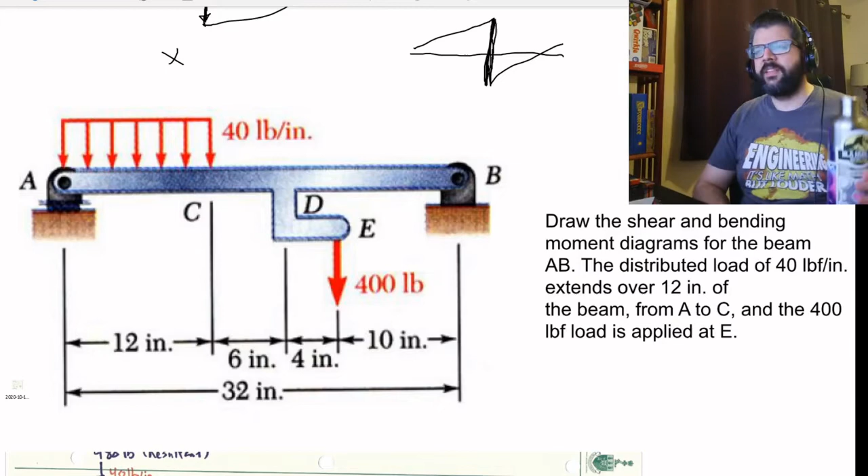Okay, so this is the one we're going to be working through next. We've got this beam here, distributed load, and then it's got this 400-pound force that's applied. There's a bit of a twist in that the force is applied on this arm that's hanging underneath. So we'll talk about how to deal with that as well.

But first things first, let's figure out what the reactions are. I've got our free body diagram up here. Got cut off a little bit at the top.

That's just me writing in the resultant of that 40 pound per inch distributed force. That'll be 480 pounds since it's spread over a 12-inch area. And we got this gap here. Then we got the arm coming down here, the 400 pounds, and our reactions.

So first things first, which one's usually the easiest to do? Sum of the forces in the x direction is equal to 0. Therefore, Bx is 0. Cross that one off. Yay! Next up, I'm just going to take the moment about point A here.

So we've got the moment caused by the resultant of the distributed load. That'll be a negative moment since that's acting clockwise. So negative 480 pounds times 6 inches, because the resultant is located halfway between the span there. We've got the 400 pounds times the 22 inches from here to here. Again, clockwise when taken about A, so it's a negative moment.

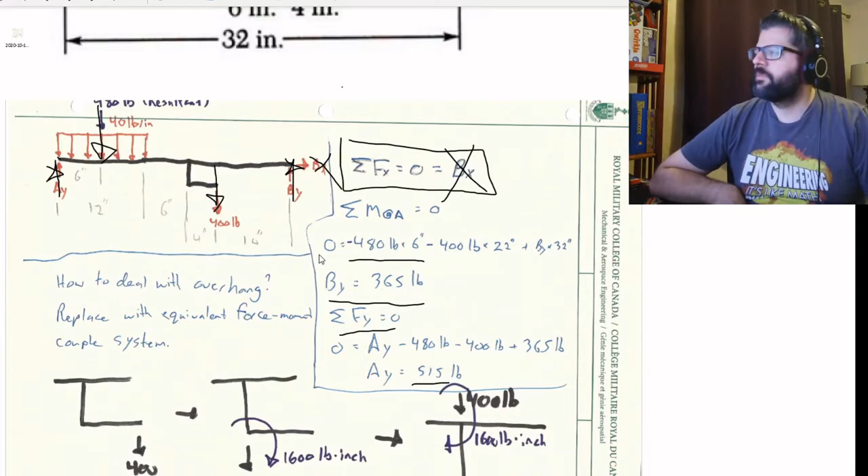So we got our reactions. There's the question of how to deal with this overhang here. So the way to do that is basically to replace this with an equivalent force moment couple system.

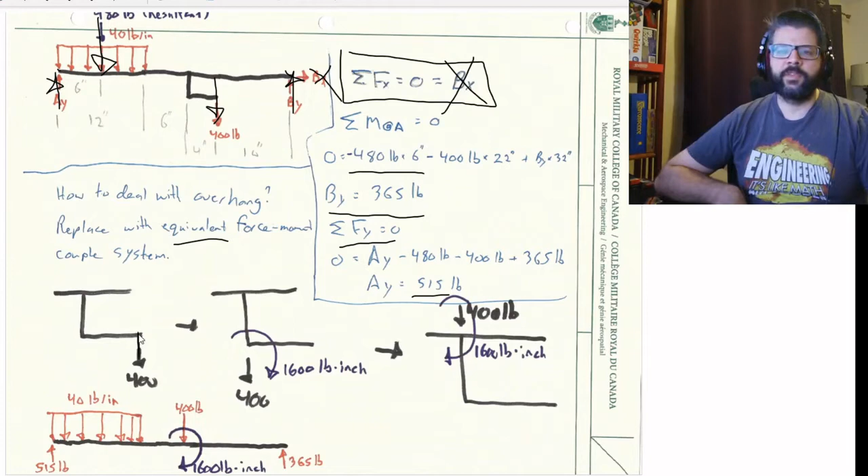So if we have the force coming down here, we realize that we can shift it back and forth along this little section of the overhang here. And we can do so and have it be equivalent as long as we add a moment equal to the amount of the moment that would be caused by this force relative to the spot that we're moving the other one to.

So if we shift the 400 pound force here over to this spot here, then relative to here, this force would have caused a 1600 pound inch moment in the clockwise direction. That's just 400 pounds times the 4 inches that shifted over.

So we've got that. And then from there, we can shift the force moment couple system upwards without impacting things because it is moving in the line of action of the force. So we don't need to add any additional moment to go from this point to this point. Shifting upwards like this doesn't matter.

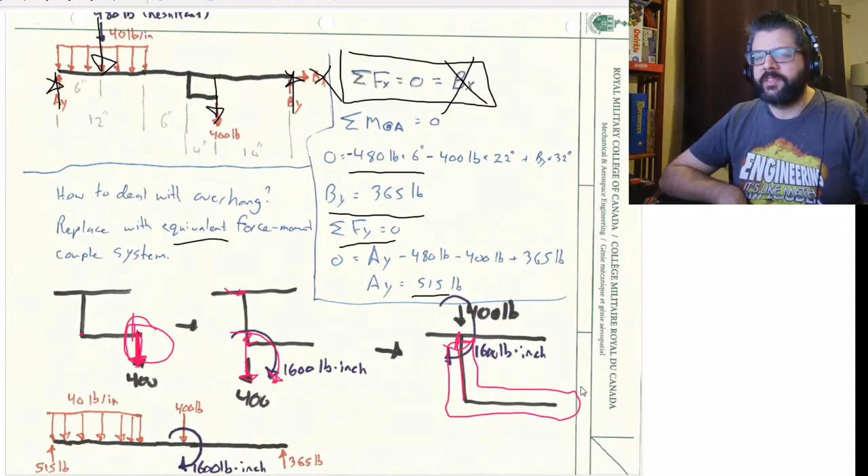But kind of just redraw a free body diagram with that equivalent force moment couple system in place. So we got our 515 reaction, our 365 reaction, our point load, our moment applied there, and we've also got our distributed load.

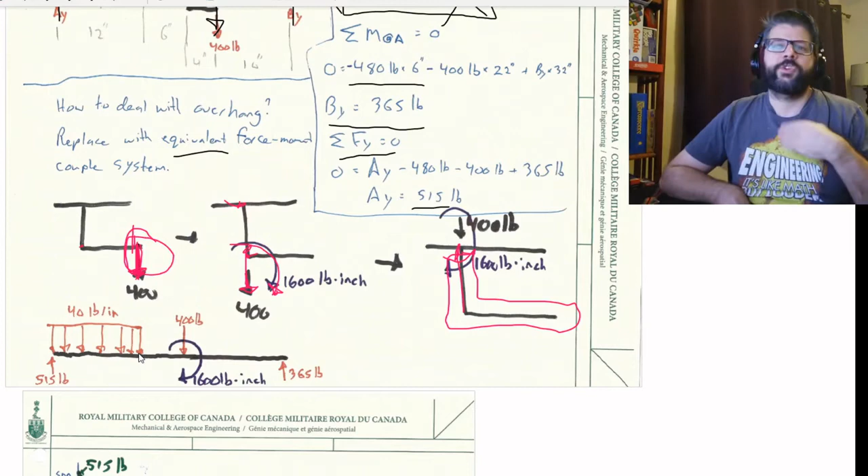So I'm keeping this one as the distributed load because we're going to be using this to draw our shear diagram. Essentially, you just start from one end and work your way to the other, keeping in mind the rules.

If we are moving from left to right on the graph, and we have a force that is applied upwards on the beam, that causes a jump up in the internal shear load at that point. And then a distributed load can act either upwards or downwards, although the majority of them are going to be acting downwards, since there's some sort of gravitational force representing some sort of mass distributed over the space.

So we jump up to 515 at the start based upon that point load, and then we've got this distributed force here, and that pushes us down, so that gradually decreases the shear until you get to the point where that stops. The slope of this line is equal to the magnitude of that distributed load.

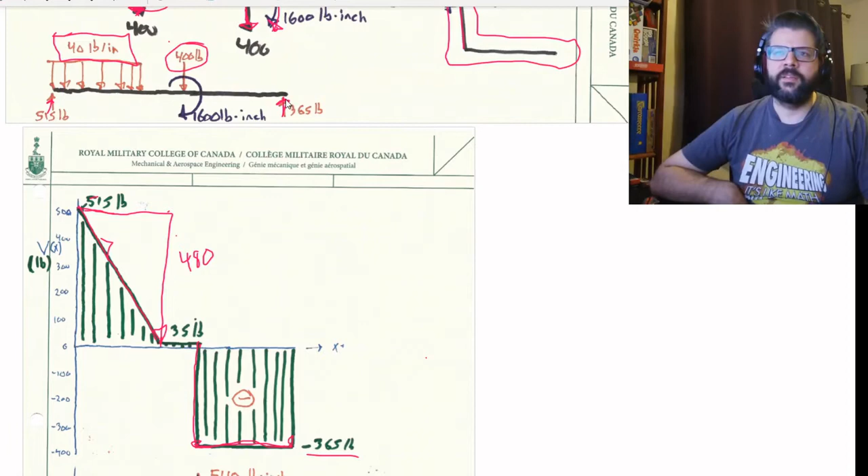Now that amount stays constant over this length until we get to this point, and then we get to this force right here. So that causes us to jump up by an amount equal to 365 pounds, which, thankfully, brings us back to 0, which is exactly where we expected to end up when we finished our diagram.

If you ended up getting to a point other than 0, there's something wrong with your diagram, and you should go ahead and revisit that.

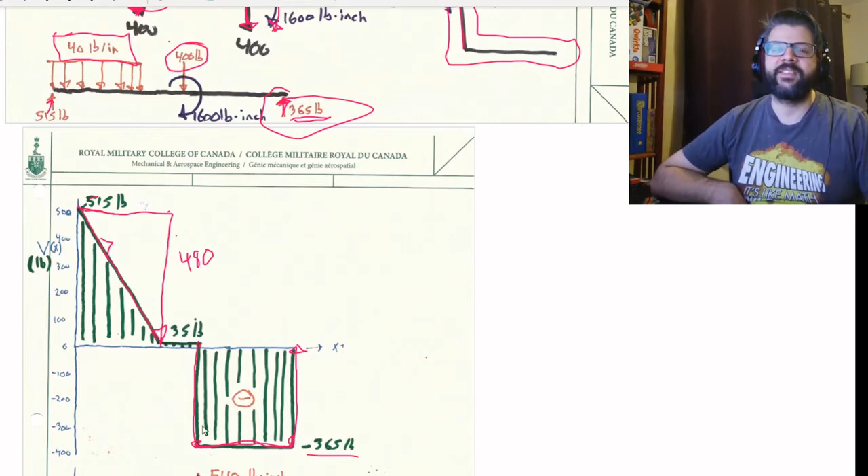So next up, we are going to be worried about what happens to our moment diagram. We know that the endpoints are going to be 0 because there aren't any reactions, because they're both pinned at the end. There's a pin here, there's a pin here, so there's nothing there that would cause a point moment.

The internal moment kind of develops over time with shear, unless you have some sort of reaction at the end where you have a moment couple applied to the end of the beam, such as what we saw with this previous example.

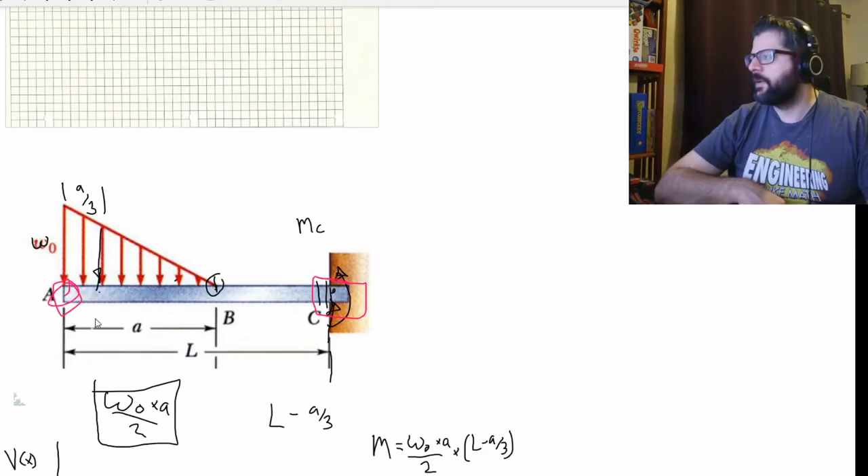Any fixed connection at the end will cause a non-zero moment at the end of the beam, but it doesn't happen on this end because that's a free end, and it doesn't happen here or here because those are both pinned connections.

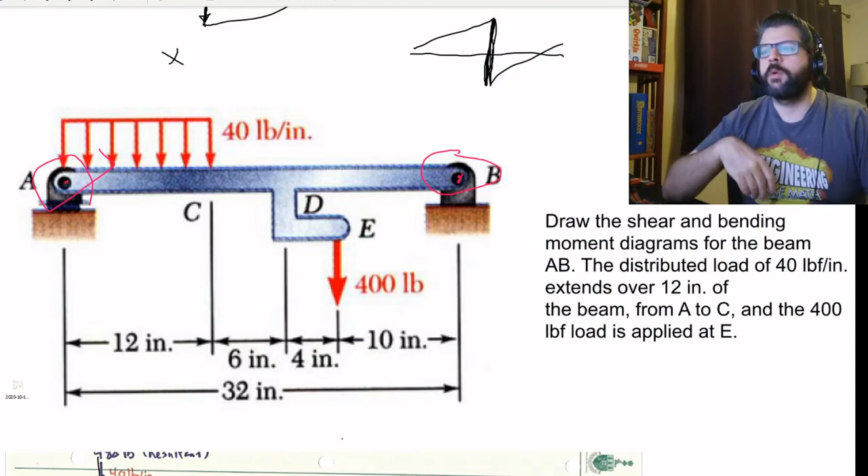They're specifically designed to allow it to rotate. So because it's allowed to rotate, there's nothing there to resist rotation, and so there's nothing there to generate a reaction moment. So we know it's 0 here and 0 here, and we can start from either of those points and work our way toward the other end.

So looking at this, it seems like the easiest way to start would be to start from this end and kind of draw this straight line, because starting with a straight line helps. So we're starting from here and working our way backwards to here.

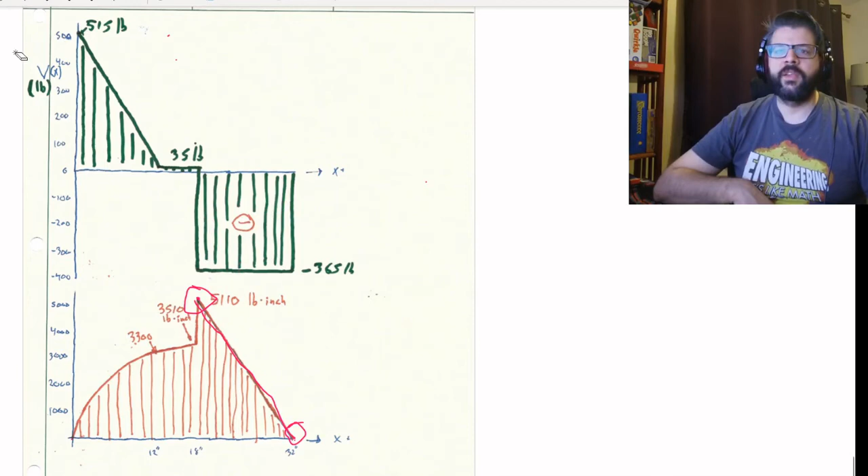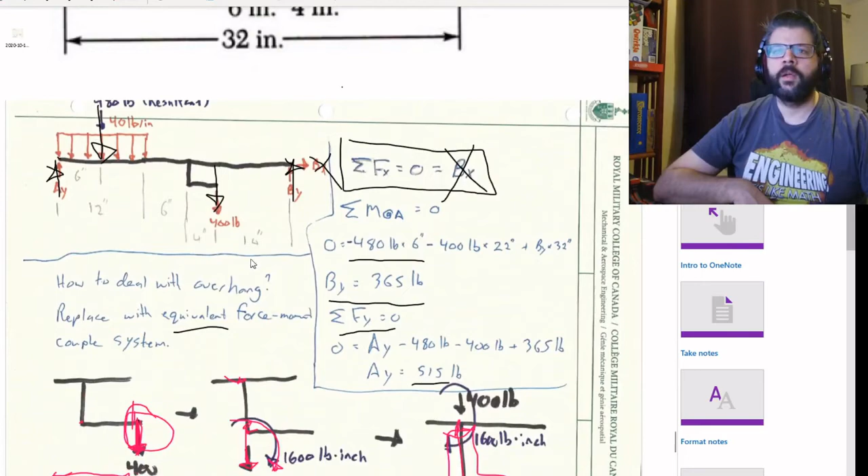So we know that the magnitude of the drop from here to here is equal to the area of this section. So that'll be the 365 pounds times the distance from there to there, which is our 10 inches plus our 4 inches, so 14 inches.

365 times 14 inches gives us a magnitude of change of 5,110, and again from this point to this point it's a drop because this shear here is negative. We know the endpoint here is 0, so when it starts dropping here, that means that value there is 5,110 pound-inches.

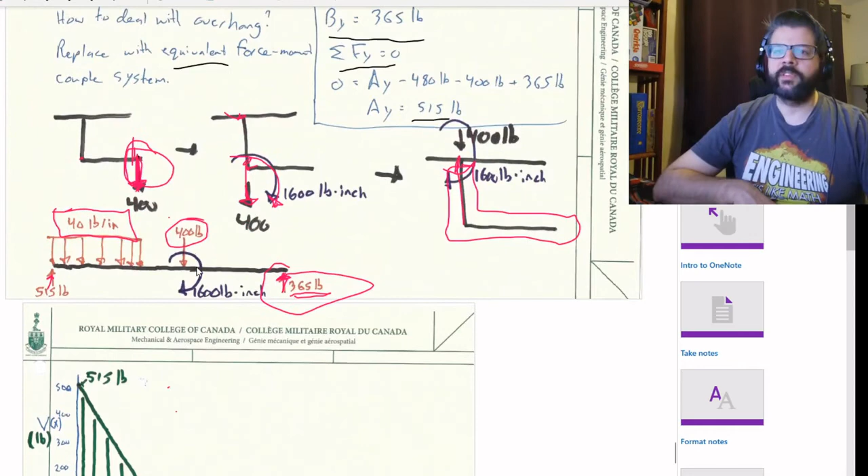We're worried about what happens on the shear diagram when it comes to the moment diagram, but we're also worried about our point moments. The point moments don't show up on the shear diagram, but you definitely need to take them into account.

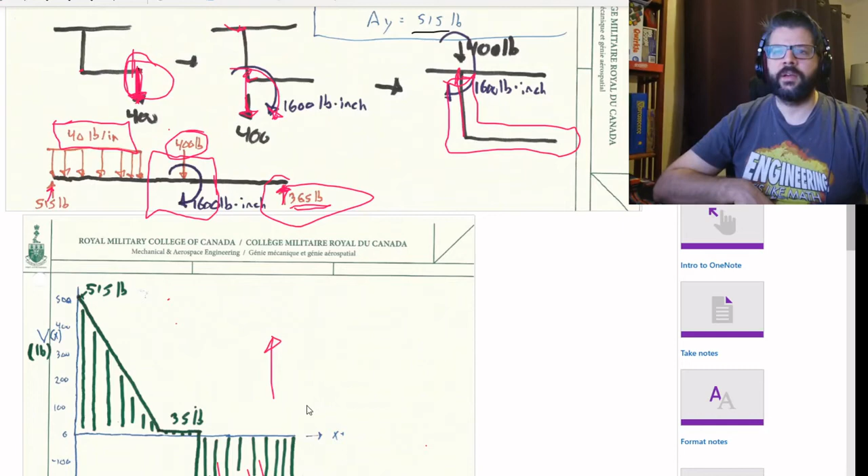So again, when going from left to right, a negative moment is going to cause an increase in the moment. When we're working from right to left, the opposite happens. So if we're starting from the right and we have a negative moment here, then it decreases as we hit that point. So at that point, the moment drops down by 1,600 pound-inches.

So that'll bring us to 3510 pound-inches at this point. Then we've got this linear section right here. Again, we know that section is linear because the shear load over this area is constant, a constant 35 pounds.

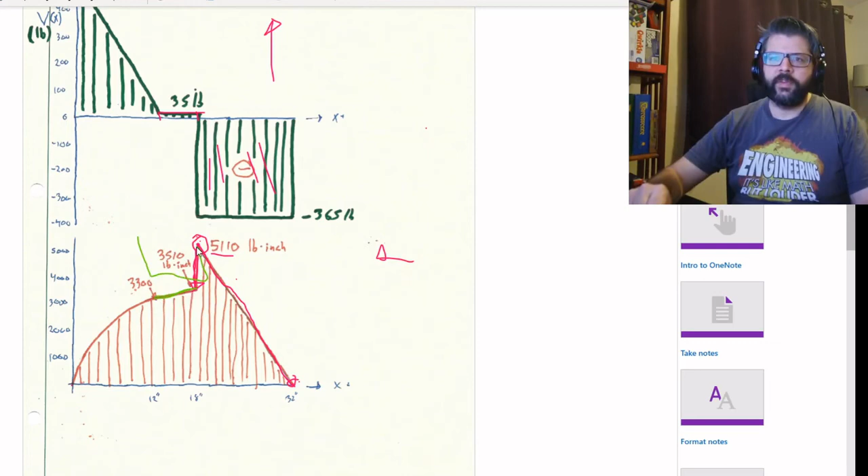So we know that the slope from here to here is going to be a constant 35 pounds. So if we're starting from this end, we can take our 3510 and subtract from that 35 pounds times 6 inches. Again, this is a 6-inch span, and that gets us down to 3,300 pound-inches.

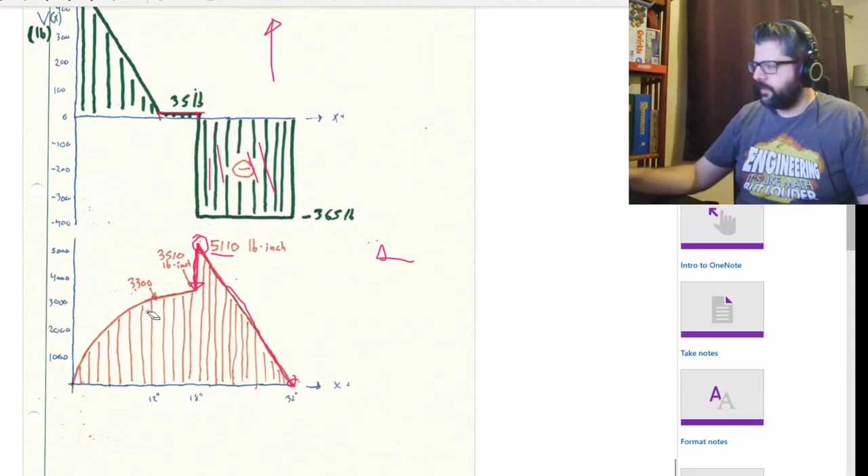And then at this point, it stops being linear, although I'm going to zoom in a bit here.

So it stops being linear at this point, but at that instant the slope is still the same, and then the slope changes and gradually increases, going from right to left. If we're looking at it from left to right, the slope starts off at its maximum and gradually decreases until it gets to that point. Maximum slope, minimum slope. So it drops off quite a bit, and this will be a quadratic kind of equation between here and here.

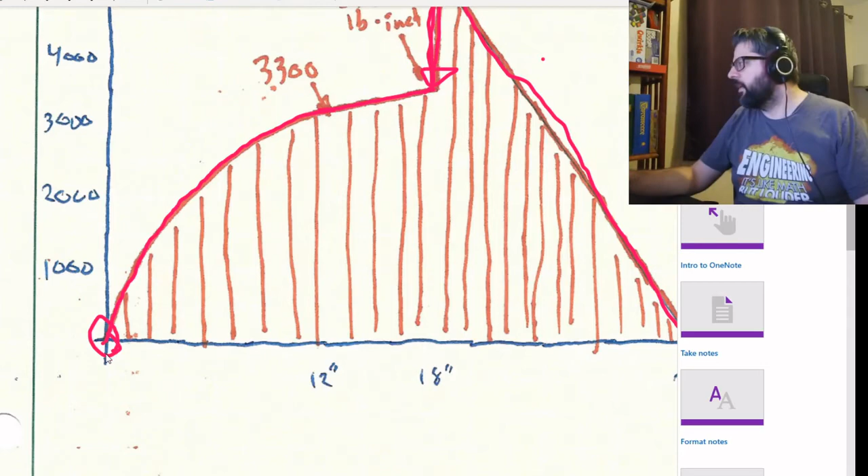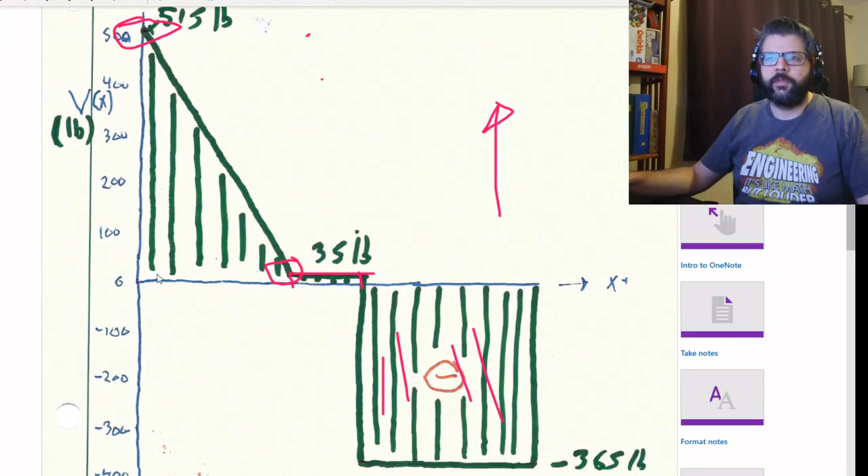So that's that curve there. Again, the magnitude of the drop-off between here and here is going to be equal to the area under this curve. So if we want to calculate that, we need to break this up into its two components. We've got this section here, this thin skinny rectangle, and we've got this triangle here.

So again, the height of that triangle is the 480. That was the resultant of that force there. Base of the triangle, base of both the rectangle and the triangle is 12 inches. So we can calculate the total change in the moment. That's going to be 480 times 12 inches divided by 2, because again, triangle, not rectangle, plus the rectangular section, 35 times 12.

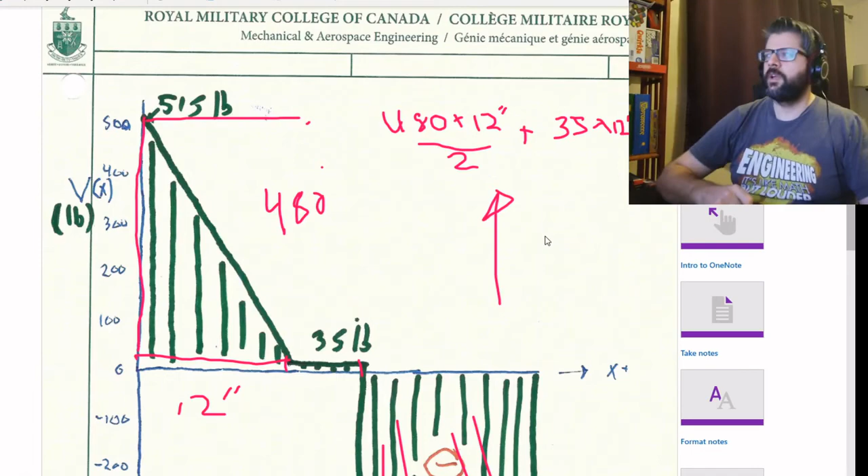So plugging that into our calculator there, 480 times 12 divided by 2 is 2,880, plus an additional 35 times 12 is 3,300 pound-inches. Hey, guess what? That's exactly the amount we expected to get.

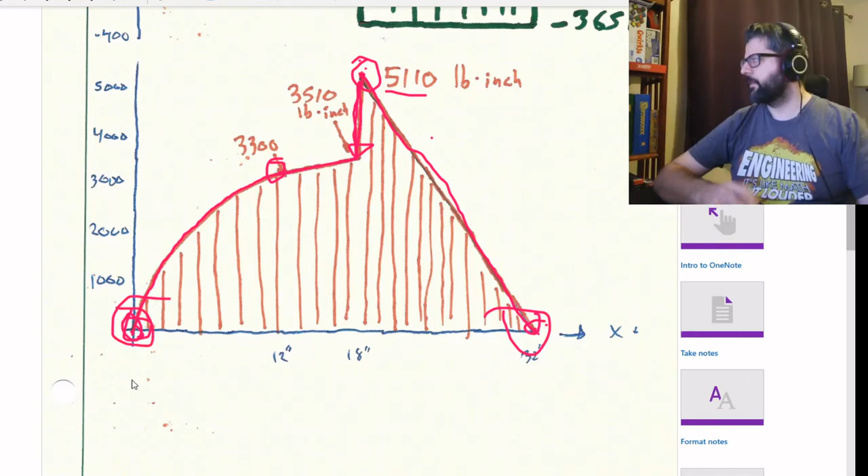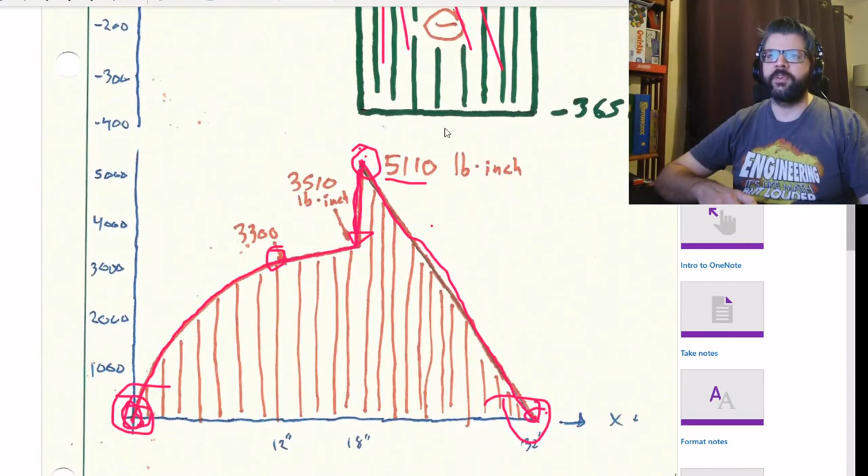So we started at 0, we increase a bit more, we jump up, we drop down, we get back to 0. So as long as you start from one end and work your way to the other, applying the gradual changes in the moment are going to be based upon the slope being equal to your shear, and then the abrupt changes are just going to be based upon what sort of point loads you're adding. As long as you get back to what you expect to get back to, then you're good to go.

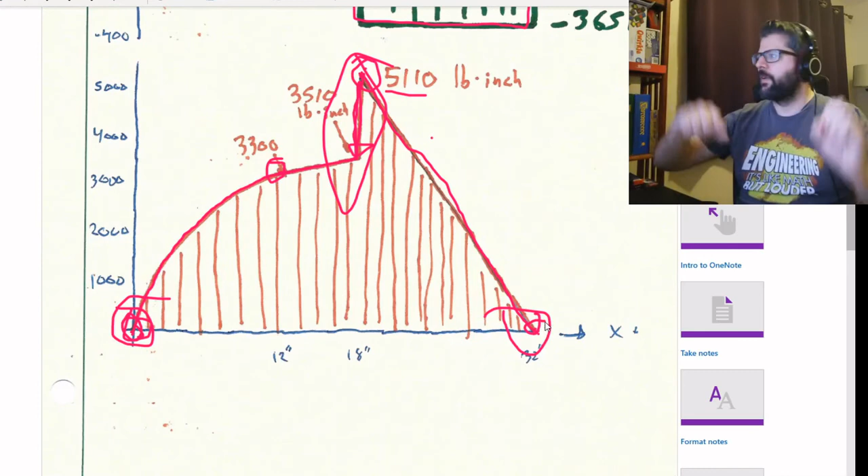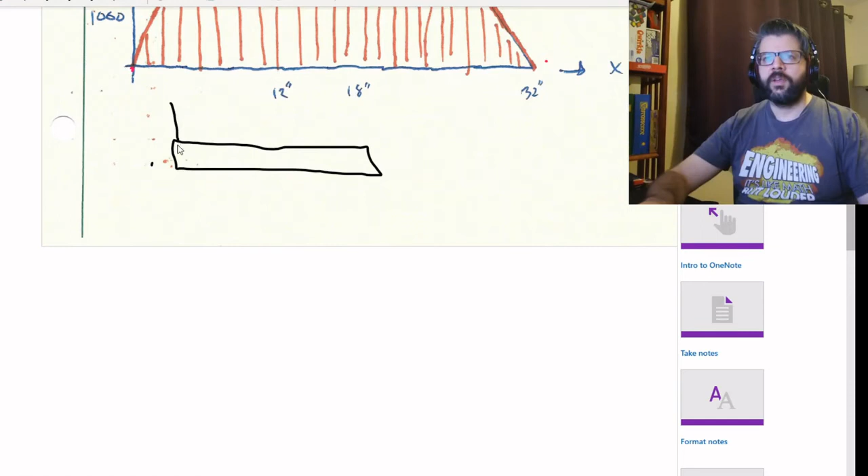So again, if you have say a situation where you have a cantilever beam that's fixed at one end, and then say a load of some sort here, what you can expect to happen is, in order to counteract the moment from this force...

...the reaction is going to cause a counterclockwise moment, which means that the internal moment diagram is going to start off at some negative value. Again, we're moving from left to right, adding a counterclockwise or a positive moment actually drops us down. And then across this span, that section would be linear because the shear would be constant.

So start off in some instances. Essentially, what we're saying here is you're still kind of starting at zero. You start at zero, but you get an instantaneous... let's... we get an... not letting me change colors. Let me change colors. There we go.

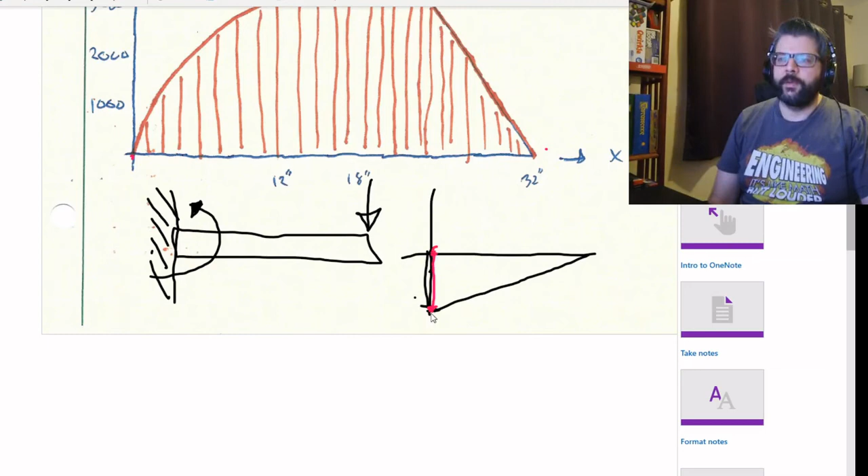We get an instantaneous and abrupt decrease in the internal shear. So we start from here, and then we go down instantaneously, and then we work our way back to zero. So start at zero, end at zero. Same thing works for the shear.

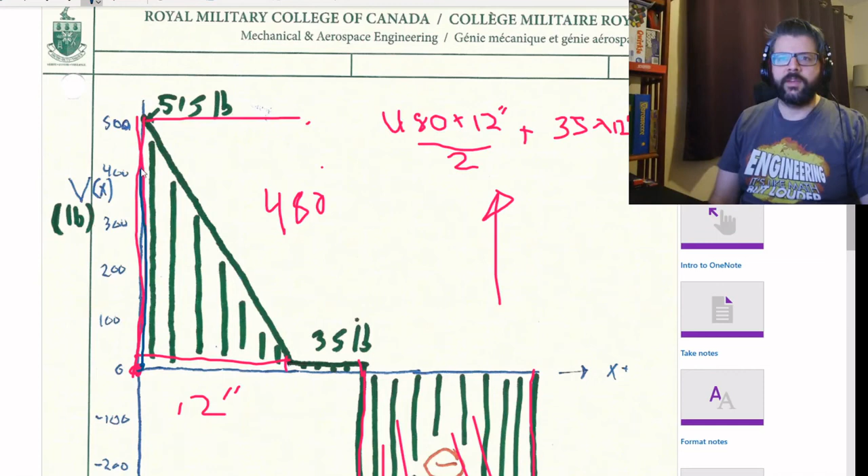Essentially, we're kind of starting at zero, but we get an instantaneous and abrupt... come on, let me change the colors. Starting at zero, instantaneous and abrupt increase, gradual drop, constant, instantaneous and abrupt decrease, constant, instantaneous and abrupt increase back to zero.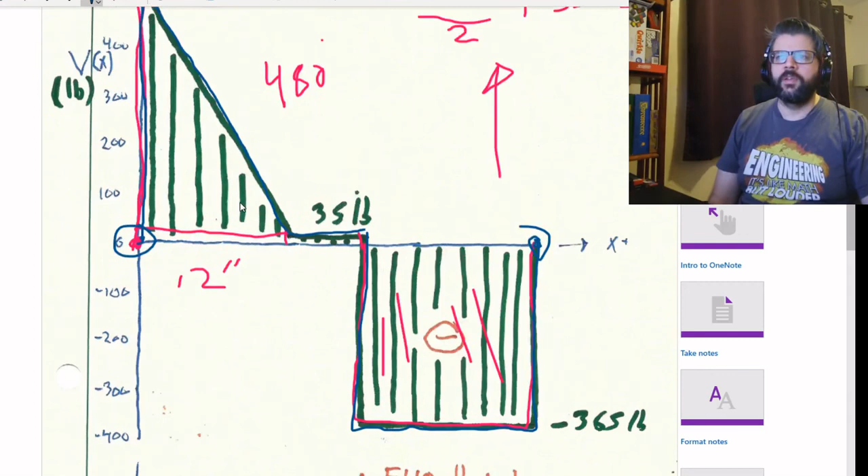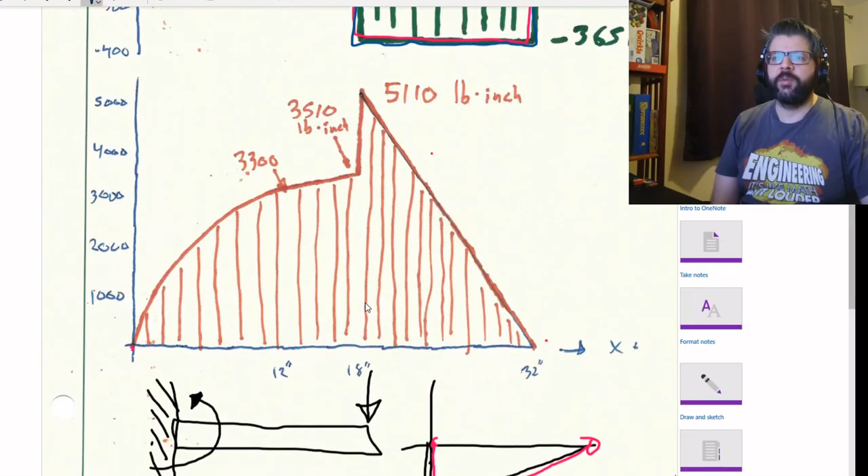So, same idea works. And that is about that for how we go about constructing our shear diagrams and our bending moment diagrams. Now, the alternate way of doing this would be to essentially take a lot of sections and analyze what the shear and what the moment would be across each of those sections.

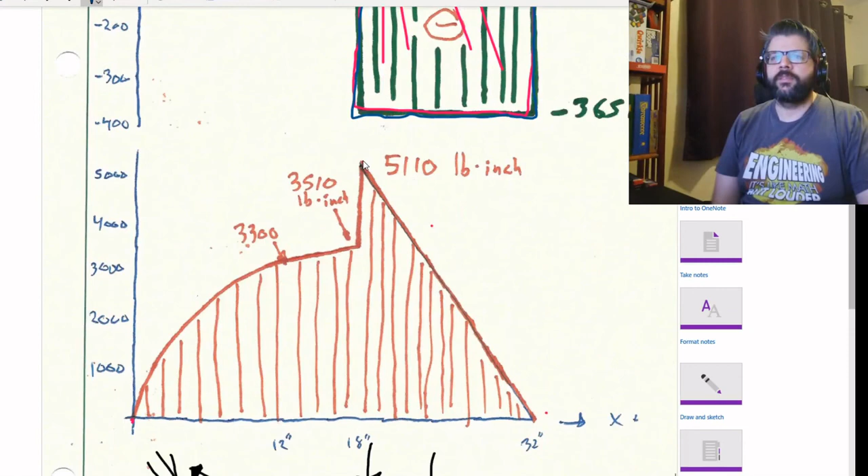And for some, the problem is that sometimes that can be difficult for students to parse, especially when you get stuff like here. Like someone might take... I've often seen... come on, I want eraser. No.

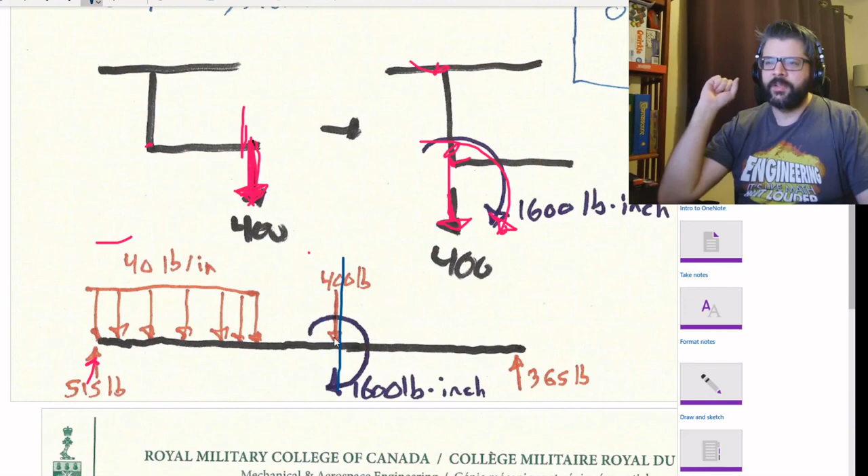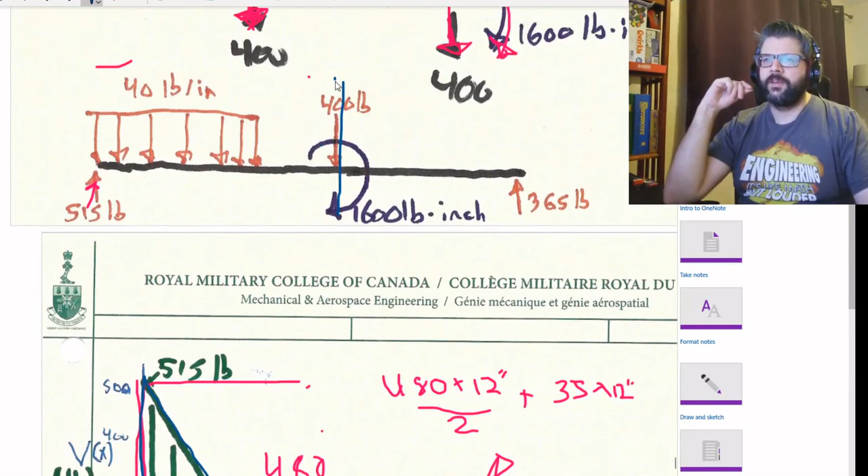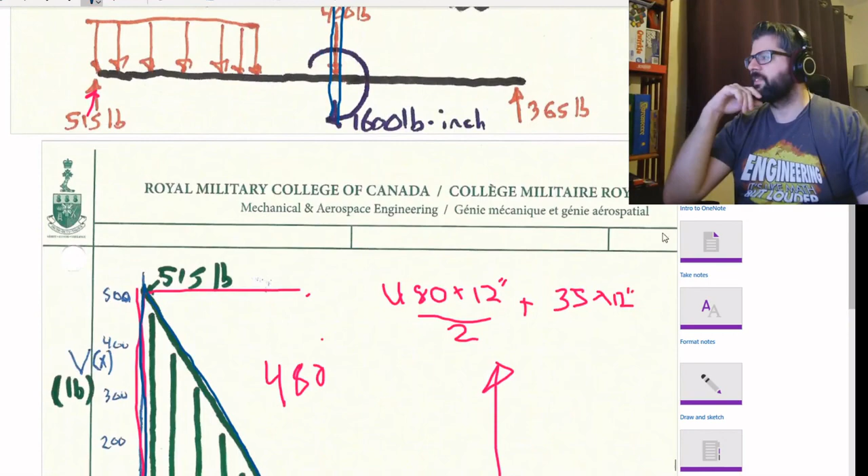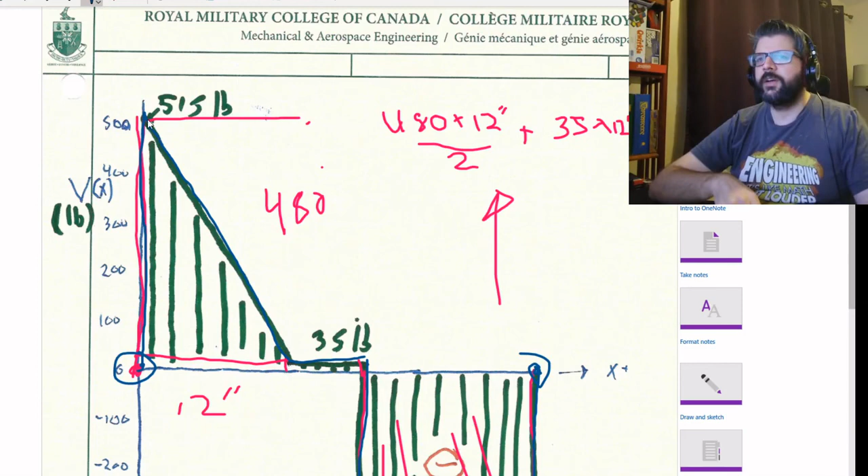Sorry about the interruption. So oftentimes, especially if you're going by sections, you might see students try to do that by, say, taking a slice right here, immediately to the right of where the moment is applied, and then they think, okay, well, I took a section right there, so that's what the moment is at that point, and then they don't take another section immediately to the left of that, so they don't capture that drop if they're relying upon just taking sections at various points. So I really do think that using the diagram method of tracking how your moments and your shear changes is probably the ideal way to go for the most part.